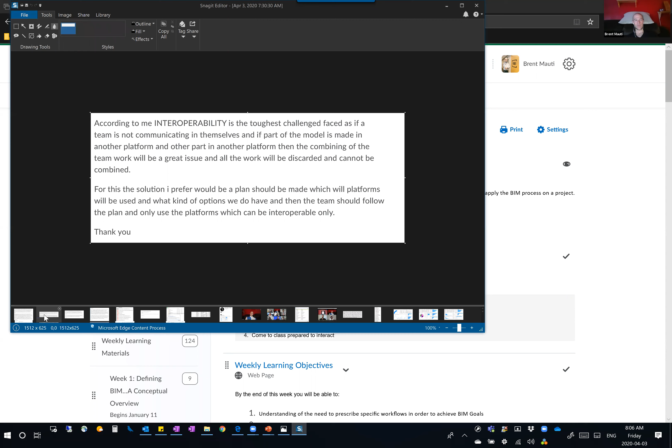The as-built, definitely a challenge. So that entire workflow process map on who's going to do it and when and why, that's very important, and it often gets overlooked at the front end of projects. So this one stood out to me because of that. We go through this on every project. The question is, who's doing it and to what detail?

And that's what's important. The whole point of the BIM execution plan: if you state the model will be used for as-built drawings because there's going to be some type of turnover, great. How? Just answer the question, or make the statement that this needs to be defined, and then follow up and define it on the project.

And of course, my passion is in asset management, and this is very challenging because, as said here, if it's not thought about at the front end, so week 2, right? If it's not talked about, how do you know? How do you ensure software interoperability if you don't know what's being done and what's going to happen to that information at the back end of the project? How do you collaborate, not just with the design team to make sure you're modeling what's needed, but with the stakeholders?

So at Turner Fleischer, we have internal development teams, and one of them is the FM dev team. And I lead that team, passionate, love it. And we're using our office as an example. We're going to say to clients, hey, we do digital twins, we do asset management, we're building this service, come to our office and experience it.

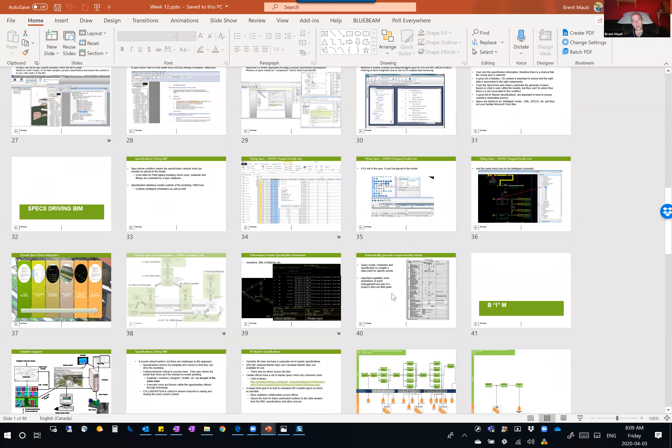So let's go to the presentation here. So this one, it'll go quickly. I'm going to go through some BIM uses, and then this ends with these diagrams. I'm not going to dwell on these, and depending on timing, I'll see how much to show when we get to those diagrams, just because I know I'm trying to cram in a couple of sessions here all at once. So jumping in. What I wanted to talk about first off is, when we're thinking of BIM uses, and in particular here, I'm thinking of specifications, I wanted to plant the seed of component classification.

So just a reminder, let me see if I can minimize my Zoom window. Okay, never mind. Never mind.

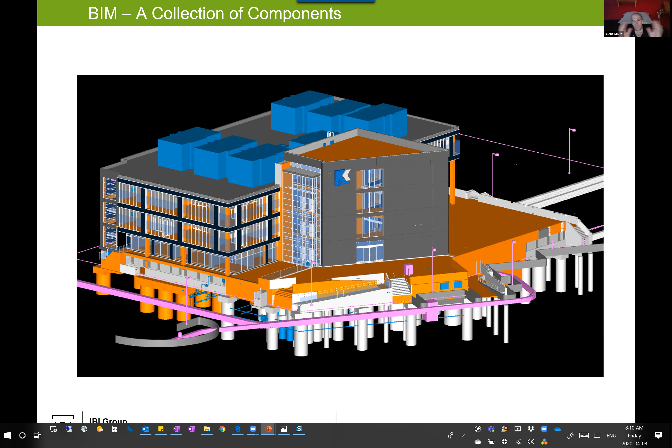So BIM is the collection of whole. We can do reviews, etc. We're made up of disciplines, separate models coming together to a virtual whole that are all made up of components. All of these components carry something. These are the things that you will connect data to, that you will harness in an asset management system, that you will connect to IoT sensors. These are the things. And when I show that, people will say, ew, why? What are these special things?

But think about it. Doors have card readers, might have infrared biometric scanners, stuff of that nature. A sink, you might have an automated mechanism so it senses there's a person in front of it. You might want to track water flow, water temperature, energy consumption, etc. All of that just from this fountain. So you never know how much information you might need. All these mechanical components, there's moving parts, there's gaskets, filters, replacements, motorized components, pumps and valves, you name it. A lot of stuff that gets operated.

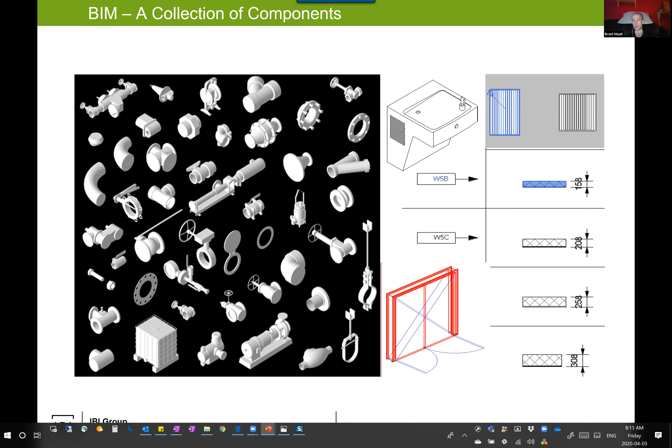So what we do is we assign classification codes based on systems to define at every level anything that goes into the system. It facilitates easy querying, easy cost estimation, allows us to span multiple files, multiple models, multiple facilities, supports all those downstream uses. But we have problems. In our industry today, there's multiple systems. Use of the systems is inconsistent, and they're not really well understood, to say the least.

So Uniclass is one system that exists, and I don't expect you to memorize any of these, but I want you to see the trend here. 15 alphabetical tables, and it kind of goes something like this, where you have multiple codes that equal something. So an external door is that, external walls is that, but an external concrete wall is that. So G251 is a wall, but G25113 is an external concrete wall. So the deeper the code, the more detailed the classification.

Then they upgraded to Uniclass 2 just to make it more convoluted. So in the world of Uniclass alone, used in the UK, Australia, and many, many places across the globe, you have two systems, pretty complex, pretty robust though, okay?

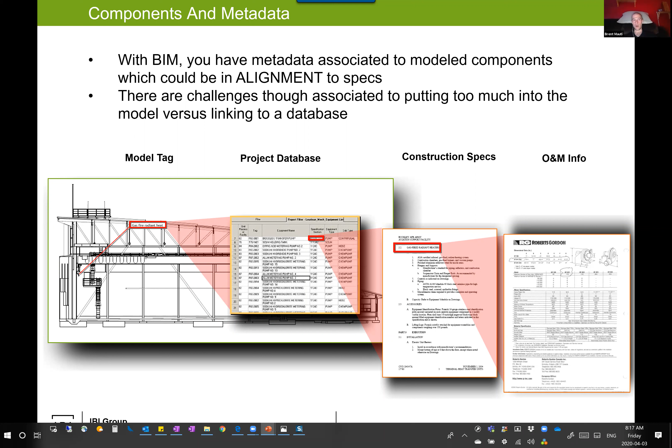It's fun. So the idea is, and I've showed this slide many times, anything we place in the model has connectivity to something else. If we carry a classification system, it's easier to connect. In the world of design, I couldn't care less. It does nothing for me. The biggest value I could get is potentially a connection to a specification. But if I put my BIM hat on and I said, there's more than just design, it's powerful.

So inside our BIM authoring tools, this is Bentley. If I go to place a door, look at what Bentley does for me. It fills out all this stuff. So Bentley has said, I don't know what you're going to use this information for, but if you classify something as a door, at the bare minimum, we're going to give you the high level categories of the door.

And notice in here, I don't know this NTE classification. I believe that's Spanish, but it could be Portuguese. So thank you, Andrea. So it's Spanish. That's built in. Oh, this one here, NATSPEC, again, a system I don't know. So their view is as they keep upgrading their software, they'll just add more and more classification tables and do the work for you, which is kind of cool.

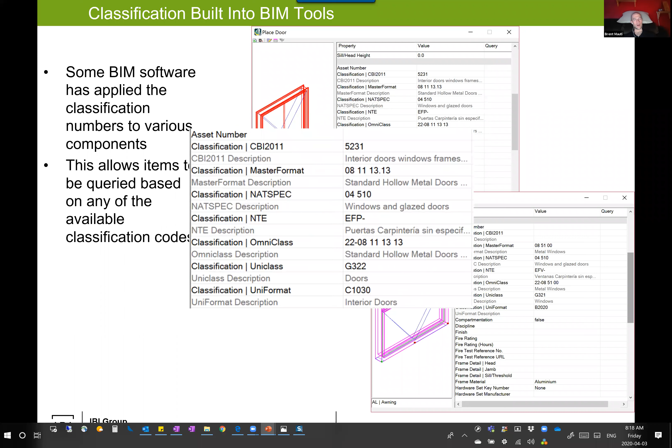So there you go. And they do this for everything. If I place a structural steel column, it's filled in. If I place a chair, it's filled in. And if there isn't an entry for the chair, they just leave it blank. So this is very powerful because if I think of specs trying to read into my model, if it's looking for a MasterFormat classification and it says, hey, I see ductwork and that's the MasterFormat spec, automatically it'll go and find the spec for me.

NATSPEC is the Australian one. Awesome. Thank you, Andrea. Good stuff. See, I didn't know that. All right.

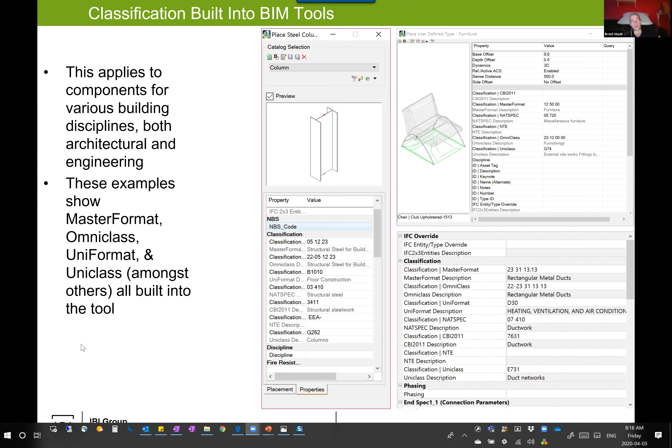And so this is in Bentley's AECOsim, which is now Open Buildings. They basically have backbone tables for all of these systems. So they do all the work, they connect it to major categories, and they empower you to say, well, you know what? I'm going to take one and maybe augment it, and it gives you the power to change.

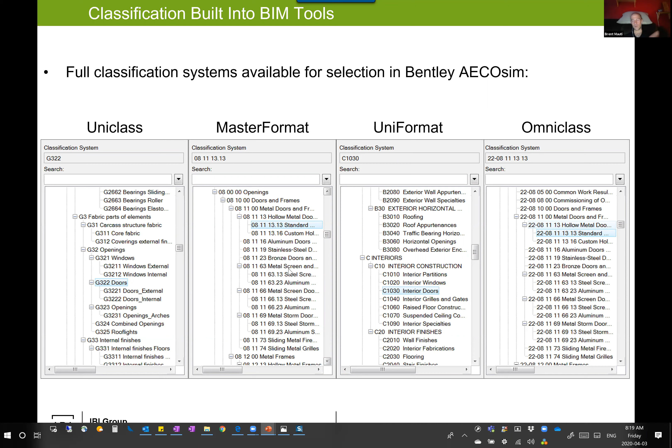Inside, sorry, I wonder if I can hide this. This is really bothering me. That's okay. Sorry, you can't see. My Zoom control panel is right on the top part of my slide.

So here again, the same example. In Revit, the table is existing. And I'm not sure, this slide was done in Revit 2016. I believe they've added most of the categories or most of the classification tables already. And usually you add that as a parameter under the assembly code. And again, it's there to be queried.

If it carries with, you can do it at the category or at the component, so the instance itself. Oftentimes at the category is good enough because most instances of a family carry the same MasterFormat spec type or OmniClass classification. Okay. So that, again, same concept, structural, mechanical, electrical, everything's built in.

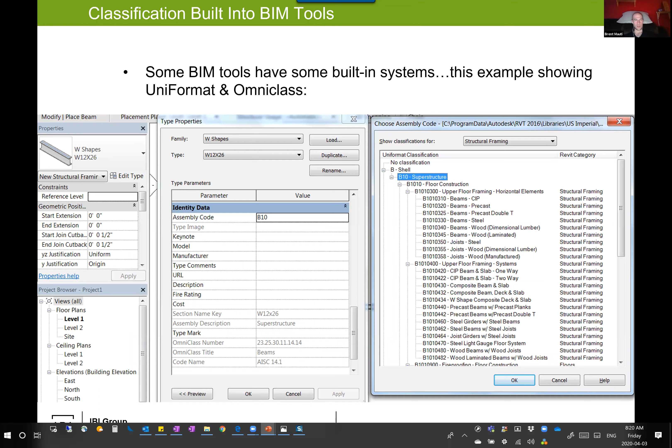So when I want to harness this information, what do I do? Four steps. I like doing this. What is the component? How do you model it? What's your data? And what's your identifier? So when I brought this up, I talked about this previously, I think, but it's very difficult or nearly impossible now to model without knowing what you're modeling.

And I always say, try modeling a door in Revit without calling it a door. I don't even know how to do that. I'm sure you could. I think it would be a lot of work and it would just be silly, right? Model what has to be modeled, understand this data. So the native BIM authoring tools are now making the native data more and more robust. So right now, I always say the bare minimum of BIM.

So I remember back in the 3D world, 3D design back 20 years ago, you would model something in 3D and actually apply a tag to state what it is. And that was crazy. Now it does that. So I don't have to tag something and call it a door. But the information from the software is now also telling me it's a door with this MasterFormat number, this OmniClass number, this Uniclass number. All of a sudden, I have a robust set of information that I can do a whole lot with.

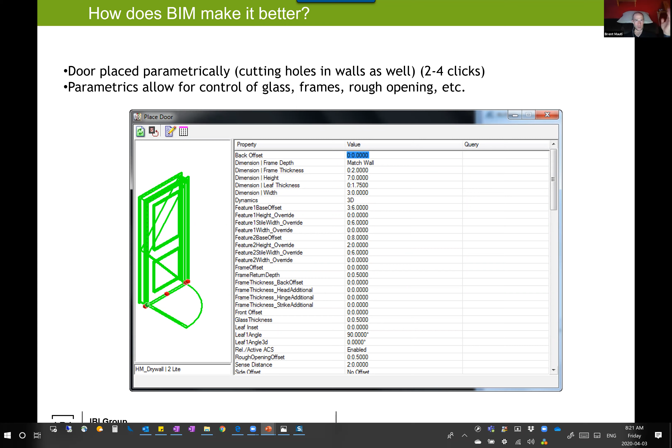And I just might need unique instances, unique identification for that component itself, so I can identify it from its like components scattered across the model. So I talked about, I think I showed parts of this in a previous one, but here's all that information. Door gets placed in, here's all the component data. Now, all the data I attach to a component has to be done for a purpose.

So the reason why the software has placed in the component classification is because there's downstream purposes depending on your BIM workflows that you're implementing. If I'm not doing cost estimation or asset management, then the data sits there and I don't care. If I am, I need it. My BIM workflow of drawings and schedules, though, very important, because as an architect with a door, I need this data. This data ties to a spec. So I need that spec. And it happens by default, no matter what, it's always there.

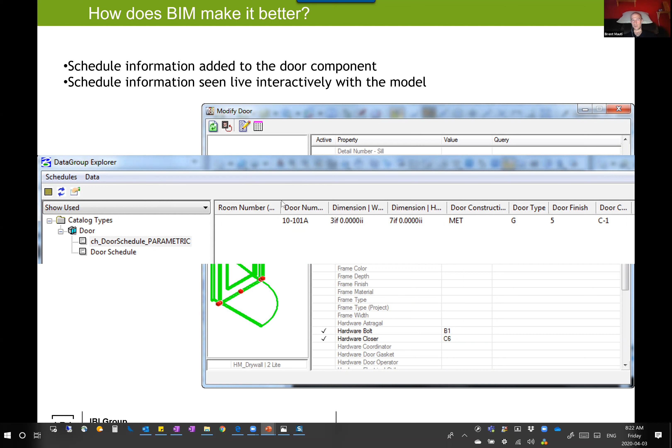Therefore, having this data in my model empowers me to do more with that information. I have the instance unique identifier. I've got the geometric particulars of the instance, material, and then all of that subsequent information that I need in order to move forward. So the components are in there. I have the confidence everything's right.

Everything from the BIM process is in place, but all that data for all these components all have some form of a classification that I can then further connect to really all my other design information, all my design data, and potentially to downstream. This here was one of the stations for Eglinton Crosstown LRT.

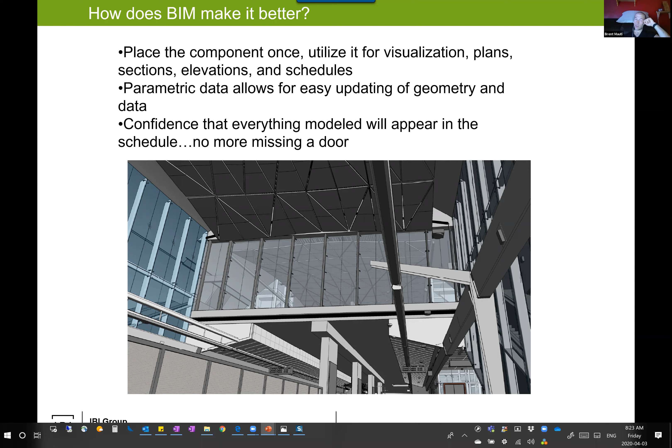So BIM and specs, metadata. The term metadata is information about information, or in the BIM world, information about components. Spec data or spec-specific metadata can be added, thus enriching the I of the BIM. So I reference tools like SpecWave and eSpecs.

At Turner Fleischer right now, I'm doing a massive, what's the word I'm looking for? Mission or task to bring to fruition a data-driven spec workflow. So these tools, SpecWave and eSpecs, are two of the vendors that we're pursuing. A couple other ones are NBS Chorus, VisiSpec, Chalkline, and a couple others, all with the concept of, I have a model, I have specs, let me connect these two.

So the models are queried, and they trigger actions into intelligent specs. So if I have that spec, when I talk about the wheel of BIM, and I say we're going to do specifications, and then we have a BIM workflow about specs, all the ins and outs from the models to the specs are what's being created here.

So if you've played with specifications, I feel sorry for you, because I've done it in my career, and they're terrible. Specifications are one massive Word document, and they suck. That's all. And it's the worst thing, yet it's the most important thing.

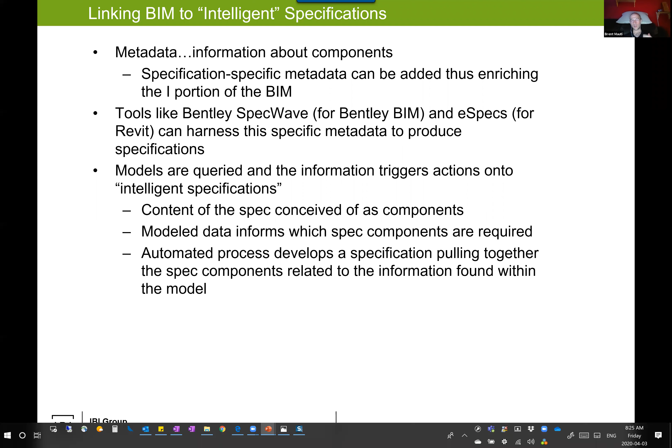So in the world of legal, if I get sued, so everything's about if I get sued, unfortunately, but if I get sued, they're going to look at my drawings and they're going to see something. Then they're going to pull up my specs. And whatever is in the spec governs over those drawings. And if my spec is wrong or I'm missing stuff, I'm in trouble. So if I could automate or create the specs in a way that is not just a nasty Word document, I can benefit.

I'm going to just talk through here what the concept of SpecWave was, but they're all similar. Inside the model, here's using MasterFormat. I'm able to select the 49 division spec section. So I know that if I place a component, it's going to be specified. So if I place a door, it's going to be a spec within Division 8. Now, what kind of door?

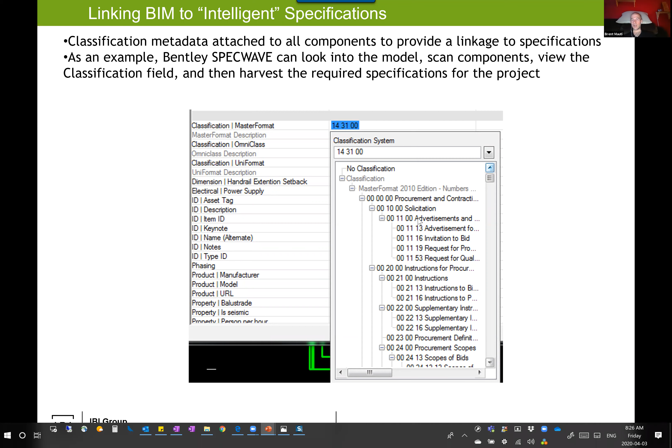So hopefully your model is intelligent enough that your family or your component, you know that it's an aluminum door versus a wood door versus a steel door. Then I'm able to select the correct section that's based on aluminum versus steel versus wood, etc. So any component in the model, I'm able to select the section. So here you're looking at standard hollow metal door.

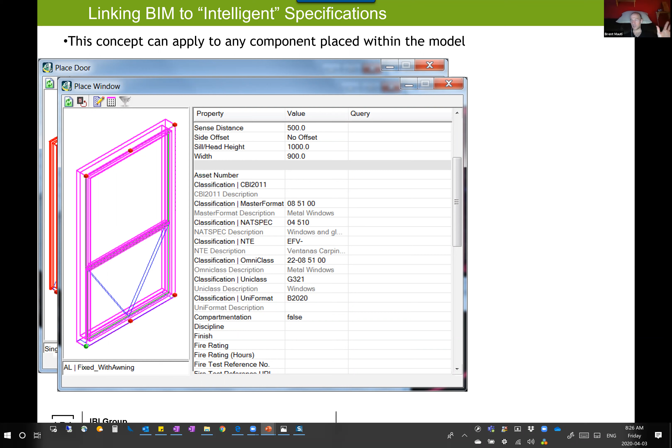It's 08 11 13. Metal windows, 08 51 00. These are standard specs. I don't make these up. You just select them. That's the spec number from the Spec Institutes. If I place a chair, it's a piece of furniture, 12 50. Okay? And they all go on and on. Same examples for steel. You can see the spec sections here that are coming up.

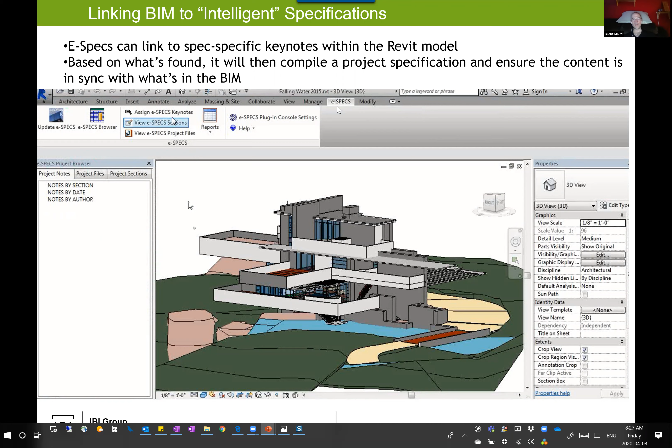Then what happens, this here is showing e-specs, looking at the Frank Lloyd Wright Fallingwater model in Revit, but it doesn't matter what model, it's all the same stuff. So SpecWave, eSpecs, Chorus, Chalkline, VisiSpecs, they all do the same thing. They drop in an add-on into whatever BIM authoring tool they're compatible with. And notice that, whichever they're compatible with. Unfortunately, there's no one answer for everything.

Then it brings up your spec. And the beauty of these systems is it says, we're going to take the industry standard specs that normally existed in a Word file and turn them into a database. So in a nutshell, to make complexity simple, it'll take a portion of the Word document and it's now a data entry. The most important ones are the products. So part 2 of each spec section lists out all the products.

So I'll keep using doors as an example. If I know I'm going to have a door, I go to the door spec, the product will list what it is. Is it vendored from Sherwood Doors or whoever the vendor is? And we're just building a relationship between the product of the spec and the component in the model. So if I see door, I need a spec for the door. Which one is it? And if I see door and the door is called aluminum door and it's already got a spec assigned in that metadata, the relationship is very easy.

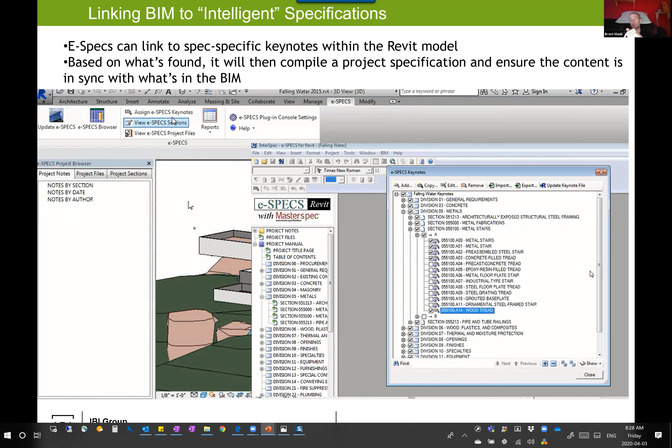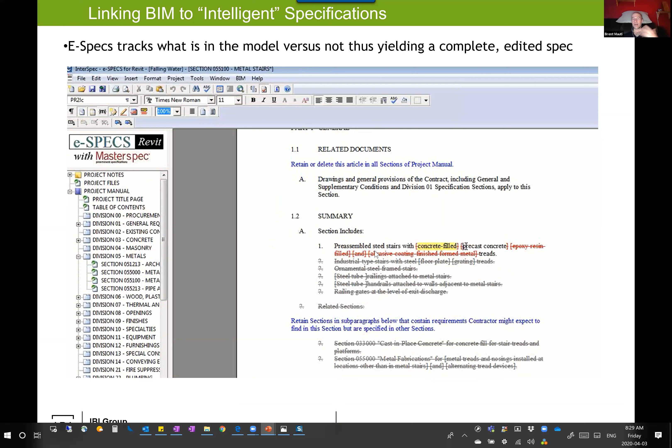If I have no special selections inside my model and my family name just says wood door, all right, I see door, I've got to make sure it's going to the wood door spec. So that's all it does, builds relationships. Inside the system, each component is a data entry. So each section is a piece of data that could be related. And that's all it does.

This is the SpecWave. And again, I don't know how Bentley brands this these days, but it doesn't matter. Same concept. Each portion of what used to be a Word document is turned into a component that can be related to something else in a model. And that's it. And then you interact, and it's more like a database. Turn on all standards for ASTM. Turn off all standards for UL. Build all my relationships. Make sure I have sealant.

Make sure I have fireproofing. And all of a sudden, all these relationships are activated. The other thing with specifications is one spec relates to another spec. So if I have a door, and I'll keep picking with my doors, if I have a door, there's going to be sealant around the door. So if I have a door spec, I must have a sealant spec.

If I have a door spec that has a piece of glass in it as a window, I gotta have the glass spec. So it builds all these relationships, and it builds that while scanning my model. So right away, when I put a door in the model, if my family has a piece of glazing and I say, hey, I need that door spec, wood door, metal door, whatever it is, it'll also give me the window spec for glazing. And it just builds all of that.

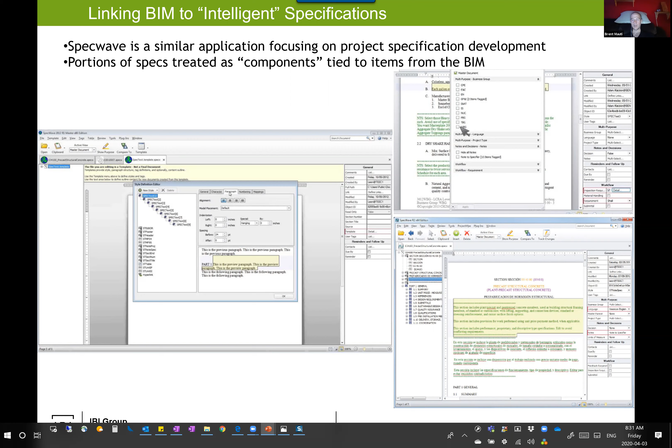And all of a sudden, I have this connectivity of data that is so powerful. And when I need to estimate, all my information is there now. My spec information that can be queried, my model information that can be queried, and with the proper estimating tool like a Timberline, it can read all that data and bring it together. It's a very exciting world.

BIM Drive is another one. This is based on Canadian spec mostly. So ARCOM, which is now, they were just bought by somebody else.

One day I've got to just sit down, lock myself in a room and update all my slides with all of the takeovers and the rebranding of all the software. It's ridiculous.

But you could see, same concept. It's an interface looking at the material parts of the specs. Here's your spec sections, selecting pieces that aren't there, and auto-selecting pieces via tiebacks to tools like Revit.

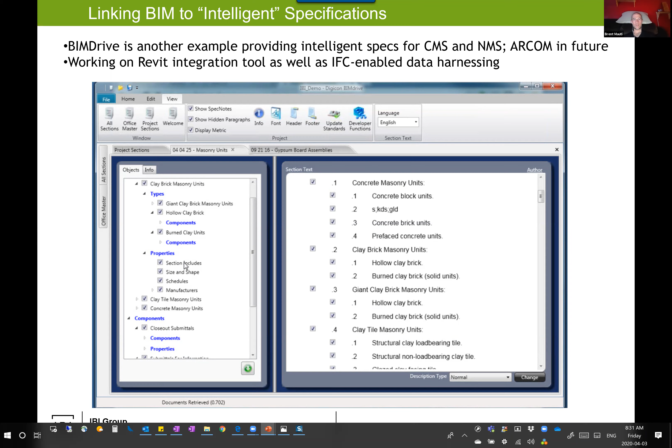So what's good? Users set spec information. What's bad? There's a chance I select the wrong spec. So this is a bit of the problem with Revit and with building applications in general. I could place a door and say, you know what, I'm going to select a window spec. Now I would be a fool to do that, but what if I do that by mistake?

What if I place a door and start misunderstanding the OmniClass, or I'm told this project needs to use Uniclass and I'm trying to select the right thing and by mistake I hit the wrong one, then I copy it and then I misunderstand the number. Who knows how? But you do the wrong one. Or in Revit, I add the wrong table.

I bring in that Australian spec because I didn't know better and I just put it in the model, and I'm thinking, yeah, that's a good one. I reference the Australian spec, the number looks like MasterFormat, and I'm just applying my MasterFormat knowledge. So I'm thinking, well, division 4 is masonry, but I don't know what division 4 is in the Australian spec, and I have chaos.

You have a good set of families, 3D content, that's important because then you can set the right parameters, potentially lock it, use tools like Unifi or BIMobject to manage an online library of your content, and you make sure that it's all robust and quality checked and good. The right tool to connect the specs to your model automates your generation, and that's good. What's in the model will be in your spec, but if your model is in error, so too will your spec. So that's a bad part.

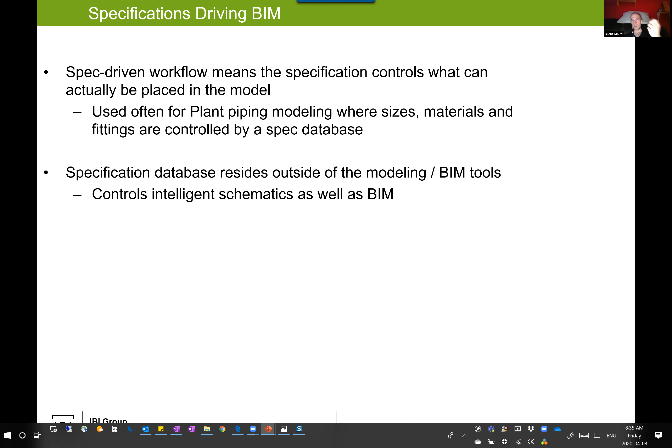And just use it in your knowledge of Revit. Just imagine if this is how Revit worked. You'd have a lot of architects that would cry, but it would be powerful. So spec databases reside outside of the modeling tools, controlling your schematics and your BIM. So I pulled these up in the past, but this was what I was exposed to very early in my career. Control what can be done.

So here, what this is showing me is for AWWA, American Water Works Association, class C115 pipe. It's telling me that in the pipe, the only types of conditions I can have are flanged conditions. That means I have a spool of pipe, and at the end, there's a flange to bolt pipes together. So one pipe goes against another pipe. The pipe might be like that small, but the flange bolts it together, and there's a gasket in the middle. Okay, too much information, it's just ingrained in my head.

This tells me the diameter of the pipe and nominal sizes. So if I say 4 inches diameter pipe, it's actually 4.8 diameter. Fine, that's just how the material works. What I can do is minimize. So imagine you're in your model and you say, I want to place a 4-inch pipe, but I uncheck that, you can't place a 4-inch pipe.

And that could be on a project where, depending on what's flowing through the project, the smallest pipe might be 12 inches. So I uncheck 4, 6, 8, and 10, and 12 is the smallest you have. And maybe the largest pipe they go is going to be 24-inch, so I uncheck all the larger ones. So all of a sudden I'm controlling. So imagine in Revit, I go to place a wall and you cannot place a wall thicker than X, wider than X. I go to place a door and it restricts the door type.

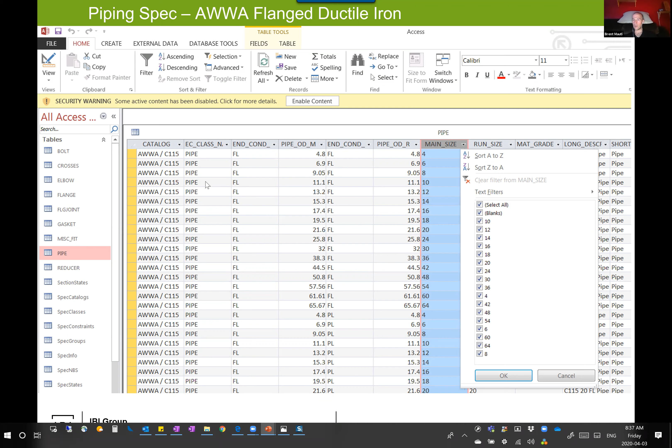And that's what they've done in the plant industry. They've restricted. So I don't come in here and put a 3-inch pipe or a 12.5-inch pipe. There's no such thing according to this catalog. Therefore, you cannot model it. Very powerful. Same with the existence of a valve. Valves are very powerful, and I can select what can be placed based on a certain catalog and certain condition.

So if I'm placing my pipe, if you're not familiar with a valve, just think of your water tap going out to your backyard or something like that, right? Or in your bathroom, if you go underneath the sink, there's a shut-off valve. There better be, or else you got a problem. And usually it's just a lever, and that's a ball valve. Or if it's one that you crank, that is a, oh crap, gate valve. Yeah, gate valve. Thank you. So like, I knew that. So you crank those, and there could be a selection.

So in my house, for example, when I bought it, I had gate valves that were failing. So I replaced them with ball valves. They're easy. Just a lever. They just turn. And so like my water to the garage, very easy to turn off and on. I go under my sink in the bathrooms, and I hate those. So there could be those requirements.

And then these go right back to my BIM use of asset management with my operators. So if we're designing an industrial plant, we used to sit there with the operators and we would ask that very question. So I remember in our designs, we would try to use ball valves as often as possible in lieu of gate valves because of the ease of operation with them. Now it depends once you get to larger sizes, et cetera, but that's the dialogue.

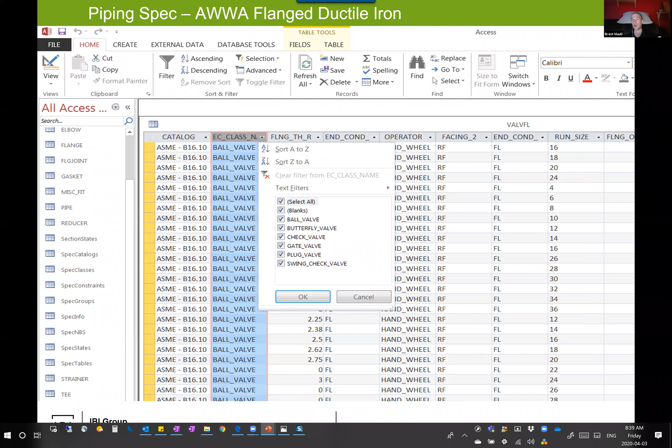And then in the spec, I can limit what type of valve can be used on what type of flow, what type of material, etc. And some of these valves don't even exist for certain types of materials. And that's the power of this spec. Then inside the modeling application, if I uncheck some of those, when I go to place it, so I want a 4-way valve, the system tells me, sorry, no can do. So I'm on a flow, a pipe stream, a pipe flow.

I have a service selected, and I may only be able to place one of these or two of these, and that's it. So a lot of piping designers, they get to know their spec. So again, think in Revit.

Just imagine if I go to place, and this is going to sound stupid, but imagine I'm in a building where we said it's a secure building, no windows. All right. I go to Revit, place window. Revit says, sorry, no. That would be pretty cool.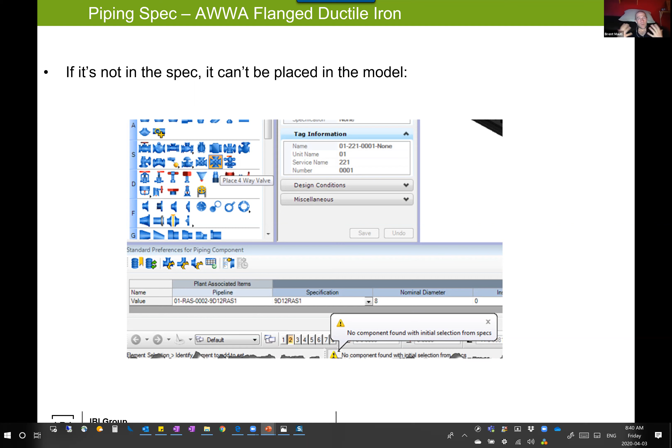Or if I can only use certain types of doors, and this will get really complicated, but if somehow I could actually specify the door prior to my design, and I'm in my design and I go to place a wood door, Revit says, sorry, you can only place hollow metal or aluminum, or you can only place stainless steel or FRP. And then I have to go find the right family. And for me, that would be amazing. I'm not quite sure if every architect would agree with me.

I've shown this image 100 times, but those same specs drive what goes in these schematics, and these schematics and the model talk to each other. So in the building world, we don't have this intelligence, but we do have electrical schematics and mechanical schematics. Those electrical and mechanical have all the assets that I then want to operate as an asset manager.

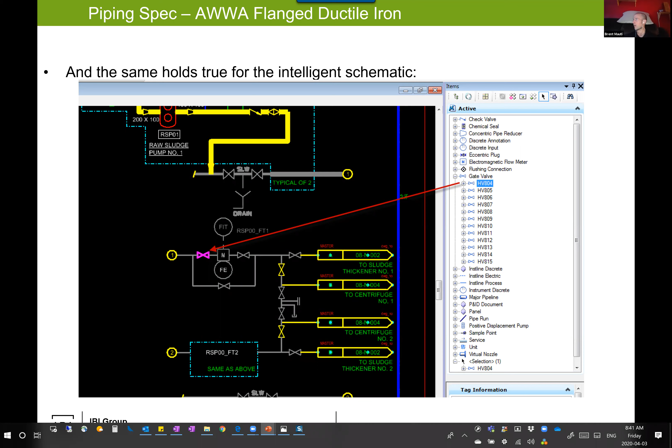So if you just look around the space you're sitting in, I see my lights, my switches, my ducts, right? My diffusers. That's what I want to operate, not my walls and my paint and whatever else I have here. Nothing too exciting in my home here.

So the workflow, and this was years of how do I make my brain understand all the crap I just said. So I spent a lot of time in area 1 and 2. Build a spec narrative, and then what's called the line class spec.

So the spec narrative is I sit down with the owner operator and I understand, what are we doing? Are we moving water? Are we moving wastewater, high pressure gas, steam, chemicals? What are we moving? Think of hospitals, food processing plants, water, wastewater plants, you name it, we're moving something in all of those.

So what are we moving in a hospital? We're moving oxygen. What material can move the oxygen? What type of controls do we need, right? In the operating room, turn it on, turn it off. Are they able to touch it? Has it got to be voice controlled, whatever?

Then I get to the line class spec and I say, okay, I know what we need. Now let me build that requirement in my modeling application. So hospitals in Revit, we got to make sure it's built right. Plant work in a plant software, usually I grab something from the vendors and I augment it to suit my project and I get my spec.

So that means I'm going to grab my catalog. Moving oxygen inside, I don't know if this is right, but PVC pipe. I grab the PVC catalog, I limit the stuff just to what I need, and that's what's available in my model. Then we have a schematic.

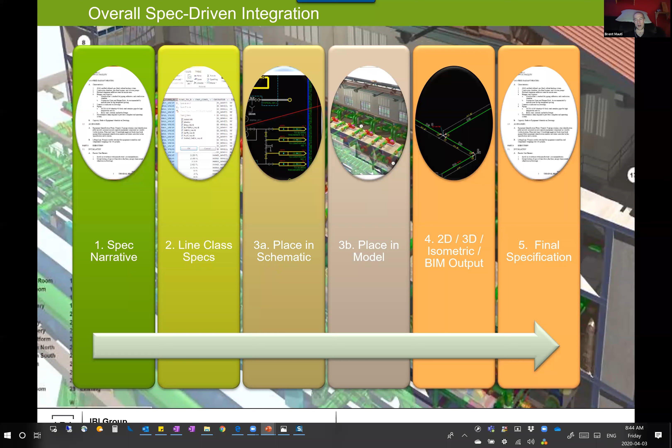Once I do step 1 and 2, my LOD, without even modeling it yet for those components, is astronomically high. Once I get to here, I've got a thing of beauty. So much data, so much power, and I'm there like the master, you know, evil scientist there with all this good stuff.

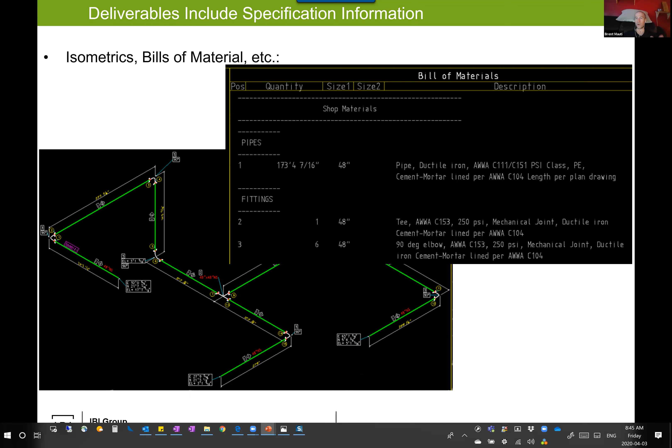This is an isometric. This is the data that comes with it. It reads data started in that spec, housed in the authoring tool. It's all metadata. It's all there. As a fabricator, I don't need anything more than what I see right here and that dimension. Right? I know the length and I know everything I need to know about it. That's it. I make it, I deliver it. There's nothing more I need to build this thing and have it ready to go on site.

It's very powerful. And this workflow has been in place for verging on, my goodness, now 30 years. The question, what software is this? This software here, if I remember correctly, this was AutoPlant, this example. But a lot of these screenshots are either OpenPlant, AutoPlant, or SmartPlant 3D, or Plant Space Piping. So those are the 4 ones that were in my experience in the past. I used too many.

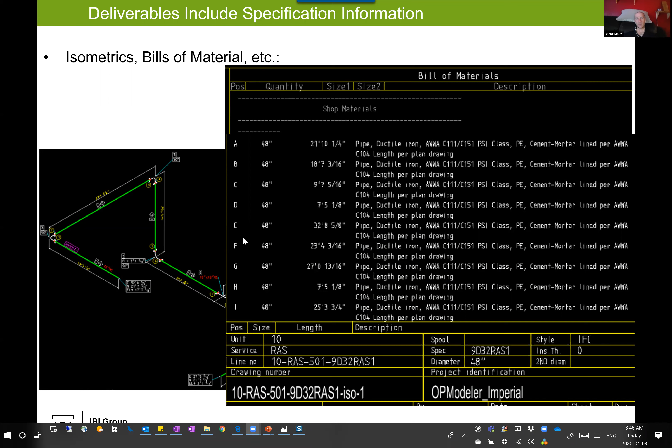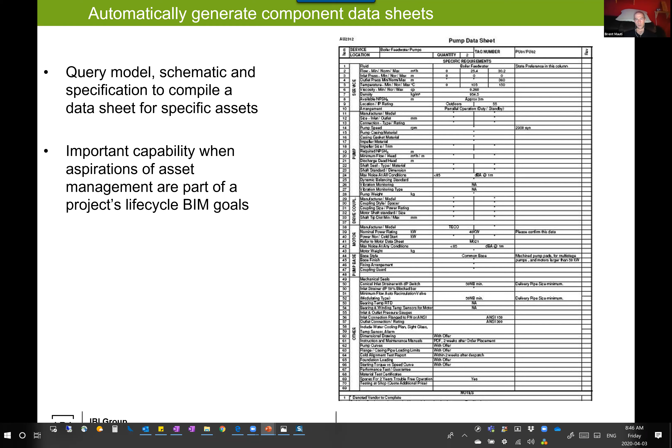Example of a bill of material, querying the model, quantification, schematics, it's all there, it's all accessible. So the I of BIM, right? That's what this is all about, really. So to make it real, this is where we get lost along the way. Everybody's pretty good right here. Everybody knows we need a content library. The robustness of the library is where we fail right off the bat.

So the easiest thing, your family name sucks. Make it a good family name. Make it good so that when I look at just the name alone, I know what it is. Because some spec tools, for example, don't look at metadata, they just identify the family. They say, hey, you have a family with no spec. Which spec do you want? If I look at the family name and it's called door 1, door 2, door 3, that kind of sucks, right? But if it's called wood door, steel door, aluminum door, I'm good, right?

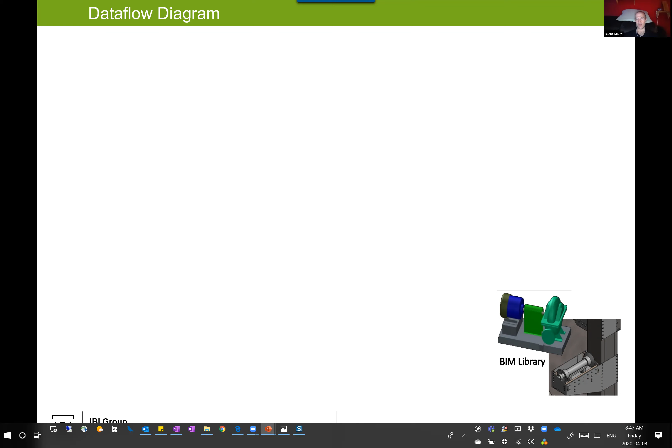If you give me metadata on that family, so you call it wood door and say it's going to use the wood spec, I'm really good. That's exciting stuff. And give me a bunch of others, it's even better. So we model this stuff. And remember, I couldn't care less about modeling applications. You're going to use the proper BIM authoring tool to author the model. If you're going to work in North America, you're probably going to use Revit, but that's okay. There's other authoring tools in North America too.

If you're anti-Revit, I'm not anti-Revit. I know Revit is good, but I know the other stuff is really good too. Just embrace it all. A couple of years ago, somebody asked, do you recommend us learning Bentley? And I'd say, yeah. If you have the opportunity to get a student version of any of the other ones, a Bentley platform, a Graphisoft authoring tool, so ArchiCAD, Vectorworks, any of them. If you're working in the building world, get one of the others.

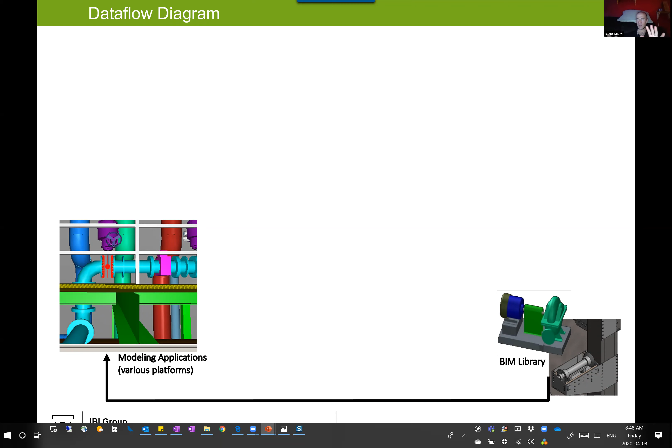If you only know Navisworks for model review, get Bentley View, get Solibri, get another one, just so that in your head, you've actually manipulated things in 2 different tools. That's very powerful. Model review, Navisworks, Navigator, Solibri, etc., all comes together. Don't lose sight of the information in your schematics, especially when you're talking about downstream uses. For fabricating, procuring, or doing asset management, there's information in schematics that is never in the model.

In the world of water, wastewater, I'm thinking of level transmitters and heat sensors. A lot of IoT sensors that we talk about today for buildings exist in plant-based schematics. Relative humidity sensoring for pump rooms. A little bit of moisture comes in, damages a $500,000 piece of equipment. It's not good. In buildings, airflow schematics and electrical schematics, a lot of data.

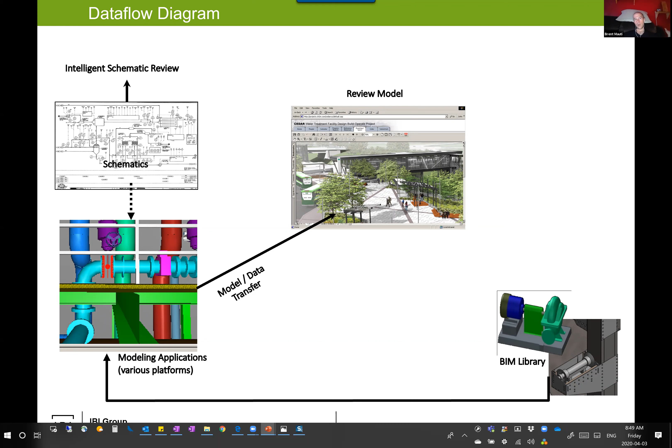Okay, then all of that gets reviewed with the client on a very old computer. I'm not implying that clients are old, but that's what that computer represents. And then we have this database.

Lots of sources of data. Revit is not the database. Revit is a database, and it's a database that comes together with all the other data from everywhere. That's the database. That's where all of a sudden I have streams of data glued together where I can report or go mobile. But if I don't bring all the data together, there's no point for me to say, hey, show me all the stuff in the Revit model.

And then I'm saying, well, where's my heat sensor? Well, we didn't model that. Oh, where is the in-ground heating that we're gonna run in the slab of my driveway? Oh, well, we didn't model that. We just modeled slab. And then all of a sudden, all the stuff that I need to control was in a schematic, not in the model, and thus it has to be in my database. So that's the important thing. That's how you make that workflow work.

And we're talking about our office renovation right now. We said, what are the assets of importance? What do we have in the model that's important? And what do we have that's not in the model? And right away we said, well, we have the desks. I said, great. Is that important? Well, every single desk, and I can't wait for this, will be electronic controlled, so it could go a stand-up desk, sit-down desk. I said, that's awesome. So those are important assets.

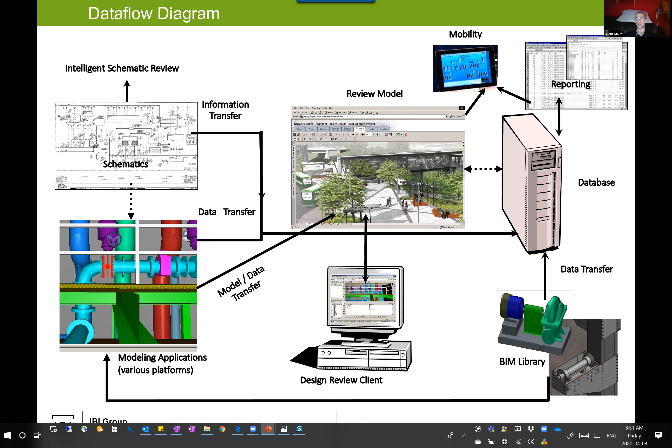What else do we have? Well, all of those desks, we might want to track how often they're used. So we're going to have some IoT sensors placed around tracking; well, those are not modeled. So all of a sudden we started listing assets and trying to identify all the sources of data pertinent to those various assets and where they all come together. So everything's great, especially from a spec perspective. Cultural behavior is critical to success. That was identified in one of the writings earlier.

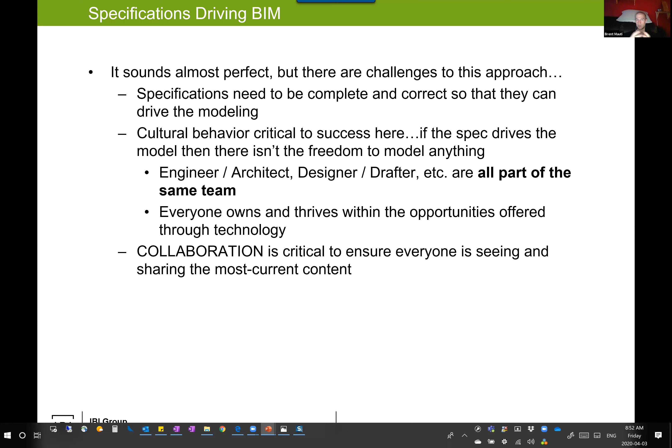Communication. How do we come together? How do we make all elements of the team, and I hate the term drafter, but it's still used, engineer, architect, designer, drafter, come together as one team, owning the technology and collaborating with their stakeholders, right? Not shielding; break down those legal barriers and empower full collaboration.

I'm going to skip, this was an IBI slide that I should have gotten rid of. So, how am I doing on time? I'm doing pretty good on time.

So, back to the workflow diagrams. I think it was in week 6, maybe, I showed the ones from Penn State. I'm just going to breeze through these again. From an IBI perspective, we kind of retooled all the Penn State ones just to brand them a little bit. Those Penn State ones look really bland, so we said, let's give them color, etc. Important for me is the orange, the info exchange. When I present these, I want people to understand that there's information that comes in and information that goes out.

Level 1 is the generic. This is just your standard flow from schematic design, design development, construction documents, record. And that's quite a leap from construction documents to record as-built, to say the least. But from a planning and design perspective, this is really the world. What we create and deliver is all dependent on the BIM goals and the BIM uses. This level 1 doesn't reflect everything, but this schematic design package could involve a parametric design, an initial cost estimate, a draft schedule simulation, an initial export for asset management review. It all depends on what we're doing, right?

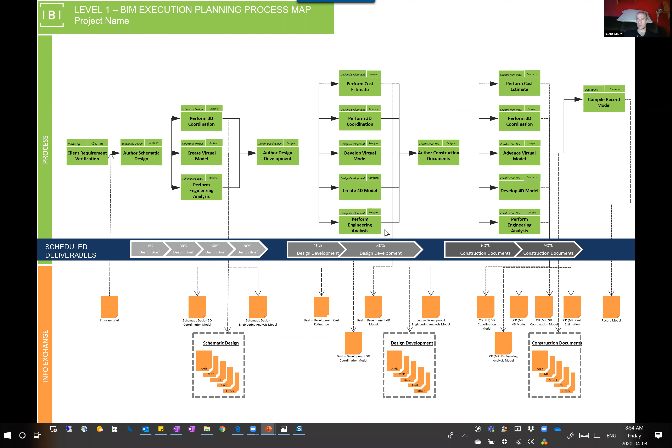The typical ones here: virtual model, create a 4D model. Notice how that's by the contractor. So in a design-build, that may happen at this stage of the project. In a design-bid-build, it probably wouldn't. Engineering analysis, maybe, maybe not, depending on your BIM use. And then when we get to level 2, we start to look at existing conditions modeling, hone in, what would we do, right? And do I zoom in? No, sorry, I don't zoom in on these, so I hope they view okay.

Now, what data do we have? What do I have to get? Are we going to scan? Is it going to be a Faro scanner? Is it going to be a LiDAR? Are we doing ground penetrating scan? What type of data do we have? I've got to answer all those questions. Am I going to go physically model with a measuring tape or a laser measurer and my laptop and be modeling while I'm out there? All questions.

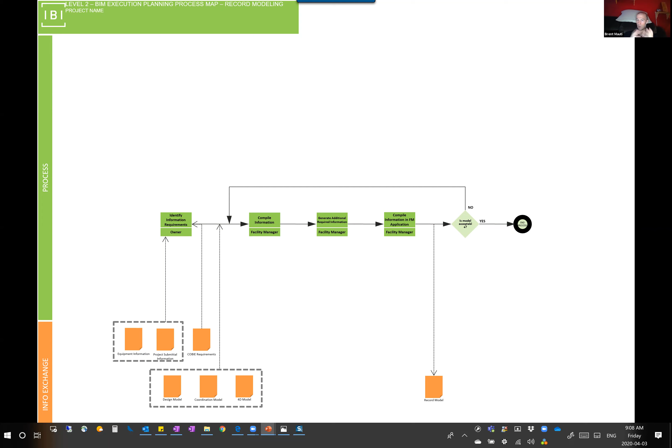So as a facility manager owner, bring me all that data. Do I care about pour joints of walls, concrete walls? As an owner, I would say no, because it's one big hunk of concrete, and if I'm gonna cut a hole, don't care where you poured it, might care where the major pieces of rebar are, definitely care if there's a pipe encased in that wall, right? Those are the types of things. So I can bring all my stuff together.

So then the last bit here, depending on where you are and what you're doing, everything I just showed back here might be completely meaningless or just not apply. So here, TTT, Thames Tideway Tunnel, massive tunnel for wastewater that was tunneled underneath City of London. So underneath the Thames River, underneath the tube lines, plus the new Crossrail transit line, plus the Olympics, everything.

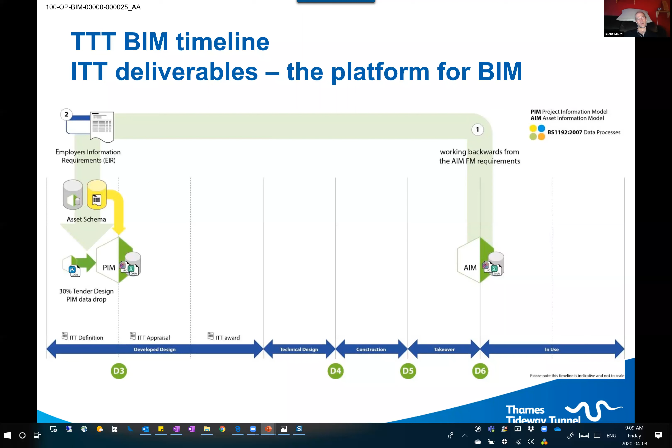So we basically said, okay, let's figure out what we need to get this, what they called an asset information model, the AIM. So we said work backwards, following the BS 1192 workflows. And then we said, okay, what happens here? In definition, appraisal, and award is development of design, construct, hand over to the operators. So we just started to look at, okay, what do we got to do? We've got to make an asset schema and feed that into the project model.

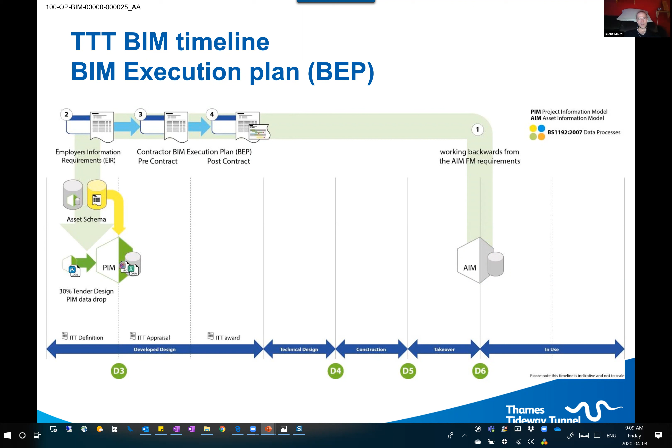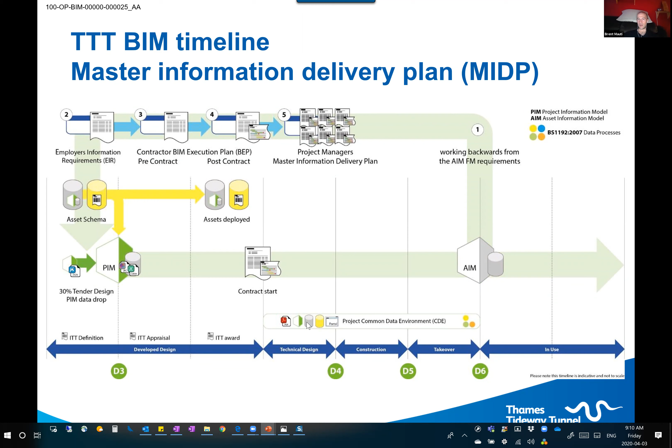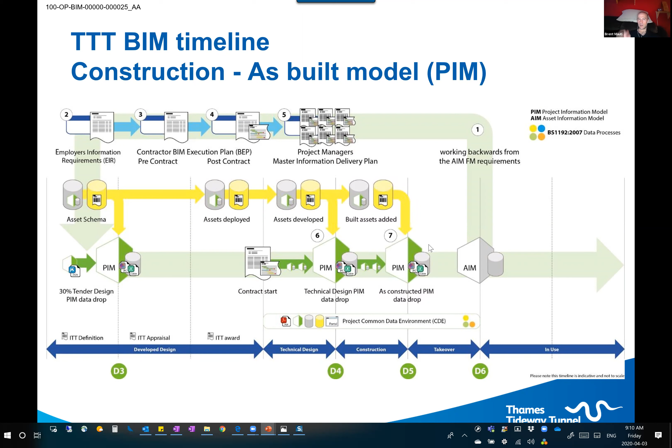And then, so that was done in the EIR. And then we start to build the BIM execution plan for the contractor. It was design build. That would include the designers. Deploy the assets, start the contract, whole host of people building this thing, feeding into a common data environment. The model, a technical data drop. So the assets are developed and built robustly into this model, and we're ready to turn over to construction. Construction data associated into the model, feeding into the asset information.

And this was presented in front of the client. And we said, this is what BIM means. This is what it means for you, an owner, for you, the asset operator. And the particulars of how we model, why we model, et cetera, all those BIM use workflows, at this level, a client couldn't care less. He or she couldn't care how we built a model, what our families are called, how we're coordinating our design.

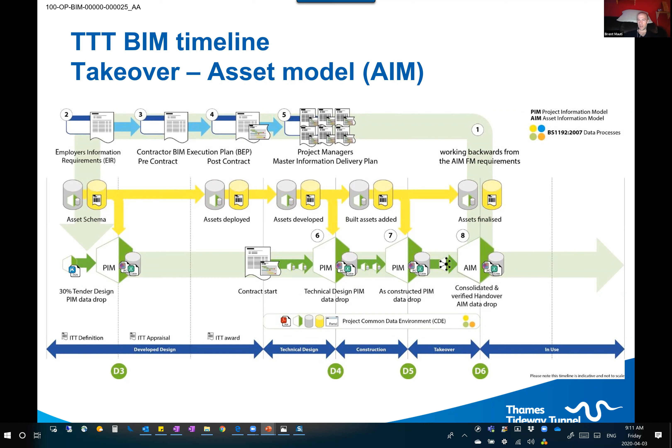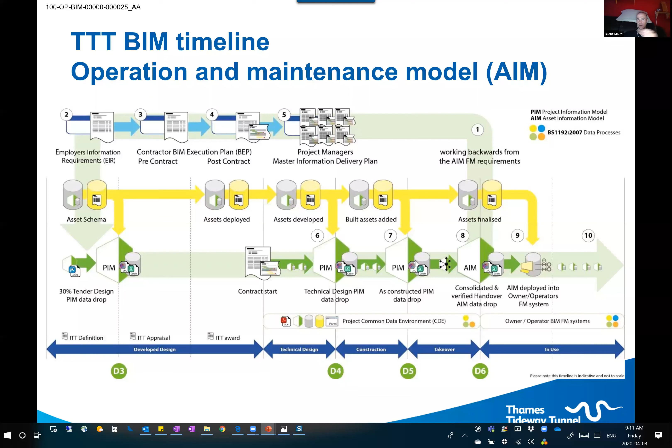They care that you're doing it and they declare it done, and you're getting me data that I could use, data that will grow as it's being built, so that when I'm sitting here, in this case, 10 years later, I have information I can use. This was a multi-billion pound project with a lot of things at stake. And then once it was built, we're in use, assets are deployed. My FM system now is manipulating that data, can feed back to it, asset data, all the model data, and I can leverage and work.

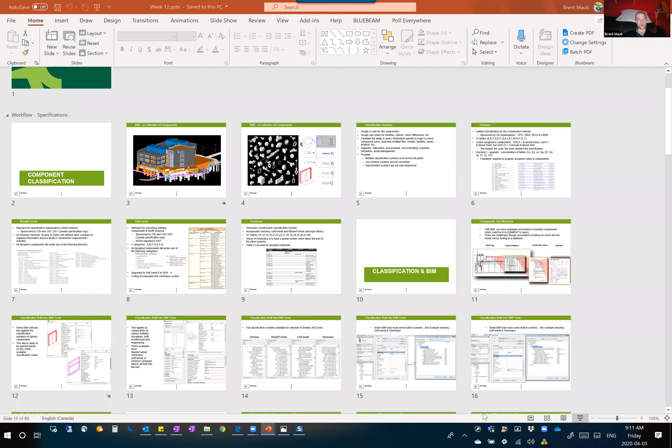So what I'm going to do, let me just see how many slides I have left here. I'm going to stop there because this just gets into further detail of what we did at Thames Tideway. But I'm going to stop there because what I want to do is quickly jump and give you a quick overview of what I was going to talk about next week.

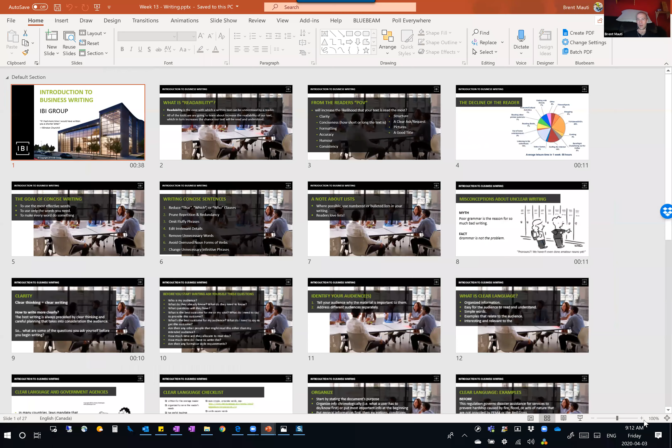So this is what I would have talked about next week. So next week, I would have started to say, okay, preamble, you guys are a week away from presenting. So the week after, it's all on you. What I find when I teach with students, and you'll notice here, how often did all of you talk during the classes? Not too often, right? And that's okay, I get it. But next week, it's all about you, so you're all gonna talk.

So simpler is better, less is more, especially when you're presenting. And that's something that you'll notice in my presentations. When I have a lot of words on the slide, I actually apologize to you. I'm like, oh, I'm so sorry, this slide sucks. And I know it does, and I kind of talk through it. I never read my slides, if you notice, maybe once in a blue moon. So I'm telling you a story, I'm telling you a purpose, and you could read my slides whenever you want, if you want. If you miss me in 3 weeks, you can pull back my slides and read through, it's all good.

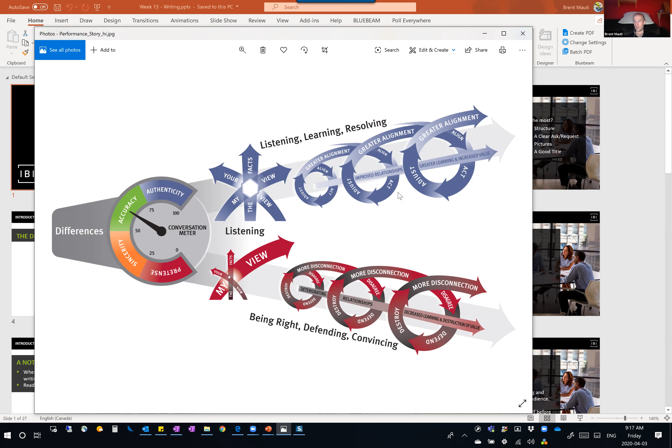Do not do what my dear student did, I guess that was 4 years ago now, and the presentation was just pieces of the BIM execution plan on a slide. I don't want to see your BIM execution plan when you're presenting. Clear, concise, this is what we're doing, this is why it'll work, we all agree, we're all awesome, done. That's your presentation, okay? And that's how you convey it to me.

So when you have a moment and you want to have a look at these, this was actually a course that was built inside IBI Group. And this one here is about business writing. And I'll tell you a story. When I was in high school and the start of university, I couldn't write, let alone speak, if my life depended on it, okay? I was shy, believe it or not. I was so shy, you know? I couldn't talk in front of a class. I was so scared to go talk to a girl. It was crazy. It's just how my life was, right?

But then in university, two things happened to me. I was in the School of Architecture, U of T, University of Toronto. They put me in front of judges and they said, tell me why your project is good. And I said, oh, that's interesting. And one year they said, your project looks horrible. We don't like it. So tell me why you think it's worthy of a grade, let alone a passing grade. And I had 40 minutes to talk about my project after that. That was tough. And I always refer to that. That was what, 23 years ago now. I'm old. Oh, that molded me to say, you know what, you could really put me in front of anybody and I can have a dialogue.

Then there was writing. And I thought I could write. I used to write these instantly. I thought it was good in high school. I get to university, my first essay was a D. I got 58% on an essay. And I said, what do you mean? Last year in high school, I got an A. And they said, but look at how you're writing. I didn't understand. So I actually went to a writing clinic. They had one offered at U of T.

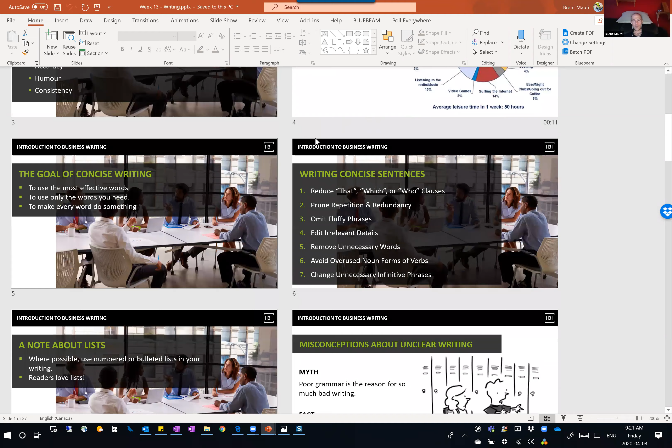And then when you're being concise, watch the words. Short sentences are good. Okay, and I say this to my son. He sometimes has the never-ending string of words. Like, no, stop. Don't keep saying that I did this, which allowed me to do this, and then this, and then this. No, stop, period, space, pause, think. Very clear. Okay. Fluffy phrases, omit them, omit irrelevant details.

We've decided to take this approach for BIM collaboration because after careful consideration and a lot of dialogue, no, just tell me your approach. We're good. I know you guys are dialoguing. I know you guys are having a group. I know you may have worked well together. You may not work well together. It's all good. I'm your project manager. Just tell me the outputs, right? Unnecessary words, avoid them.

What else was one? So clarity: clear thinking equals clear writing. So if you know what you're doing, and I know you guys will know, once you have your solution, and that's why I think of those two assignments as less writing as possible, clarity in image, clarity in words. And they were wonderful. I give you guys credit for those assignments. They actually bring joy when I see those done.

And I do bring those to people at work and I say, come on, man. Now my BIM coordinators, give me the diagram. Stop giving me all the fluff and words and thoughts. Put in a diagram, man. My students can do it. So very important on clarity.